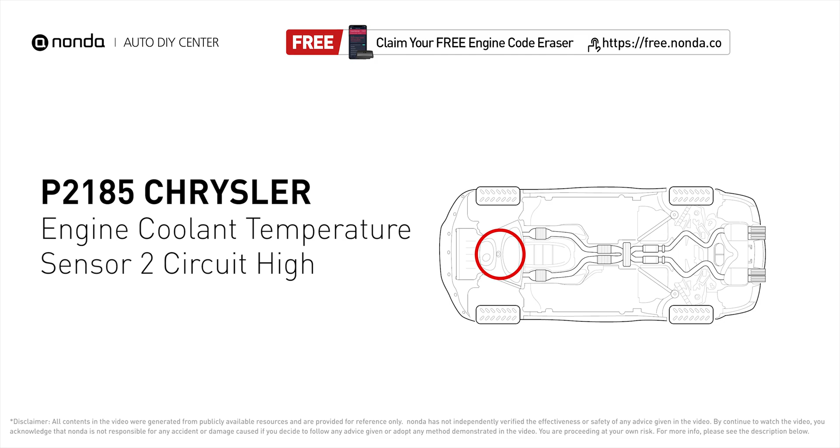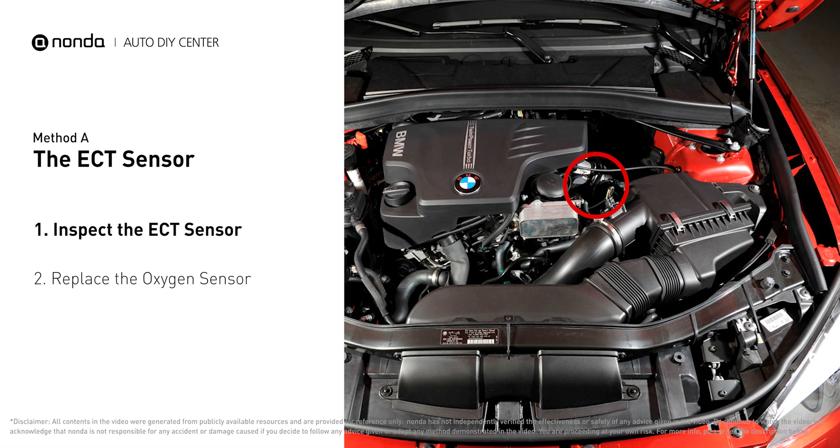Here are 3 of the most practical solutions to fix Chrysler's P2185 error code. Method A, the ECT sensor. In most cars, the primary ECT sensor is installed near the thermostat in the cylinder head. Remove the ECT sensor from the engine.

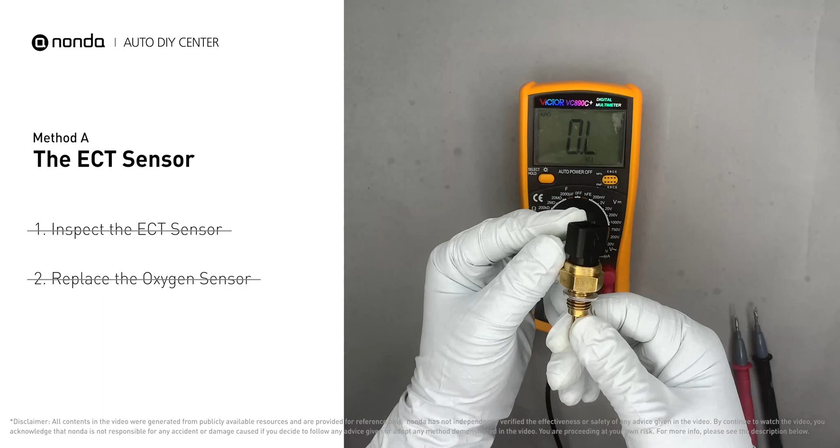Use a multimeter to proceed with a test on the ECT sensor. At the ambient temperature of 68 degrees Fahrenheit, the sensor resistance is between 2000 ohms to 3000 ohms. If you do not get a reading, this indicates that the ECT sensor is faulty and needs to be replaced. However, if the ECT sensor has a correct reading, then we will proceed with Method B.

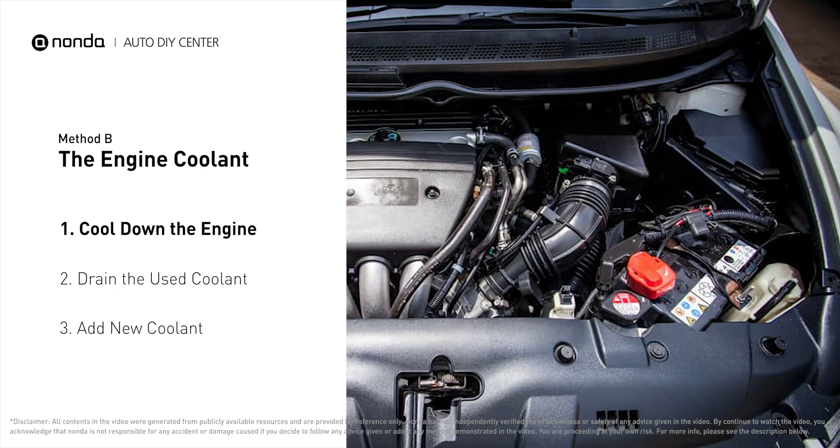Method B, the engine coolant. Engine coolant reservoir is often a translucent white bottle, and the radiator is the large panel at the front of the car. Cool down the engine and remove the radiator cap. Locate the radiator lower hose. Place a container underneath the hose. Remove the hose and allow the coolant to drain.

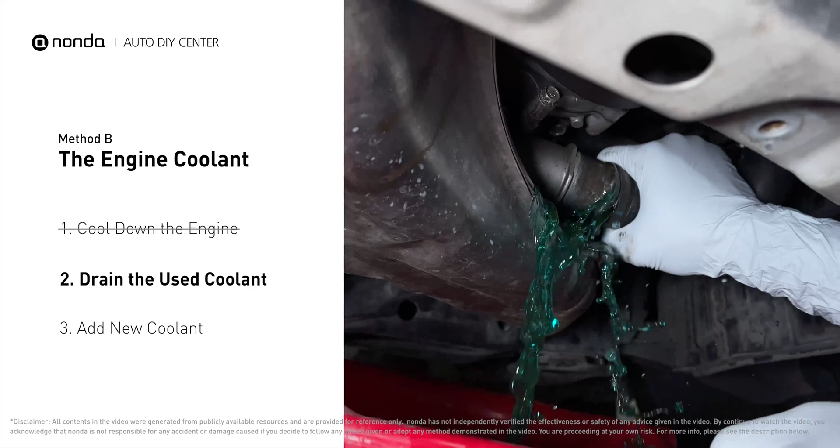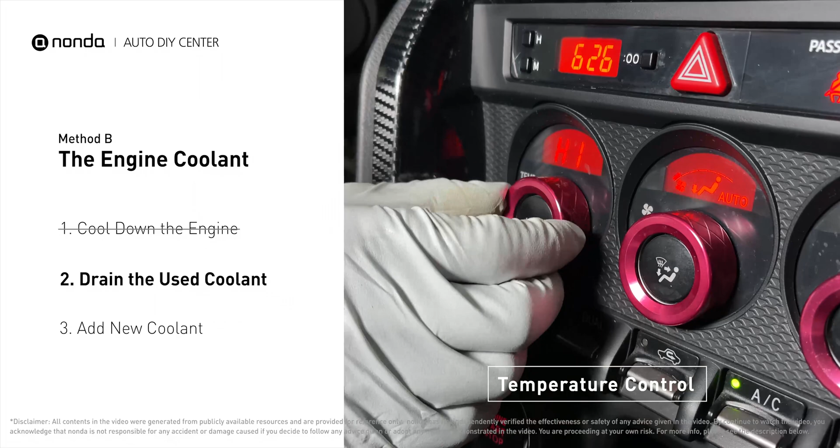To better drain out the used coolant, start the engine and turn the temperature control to maximum heat. Closely monitor the coolant temperature gauge on your dashboard to prevent engine overheating. Once the used coolant is drained out completely, turn off the engine and replace the hose.

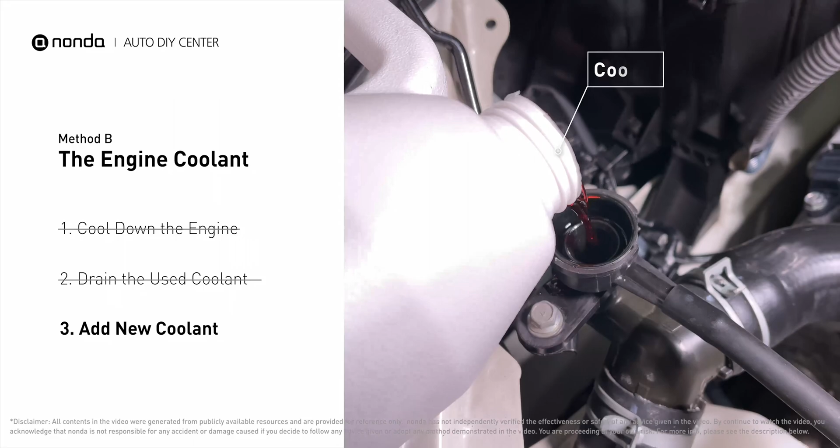Next, add fresh coolant to the radiator until it reaches the base of the filler neck. And then take off the cap of the coolant reservoir, fill it with fresh coolant, not exceeding the full line, then replace the cap.

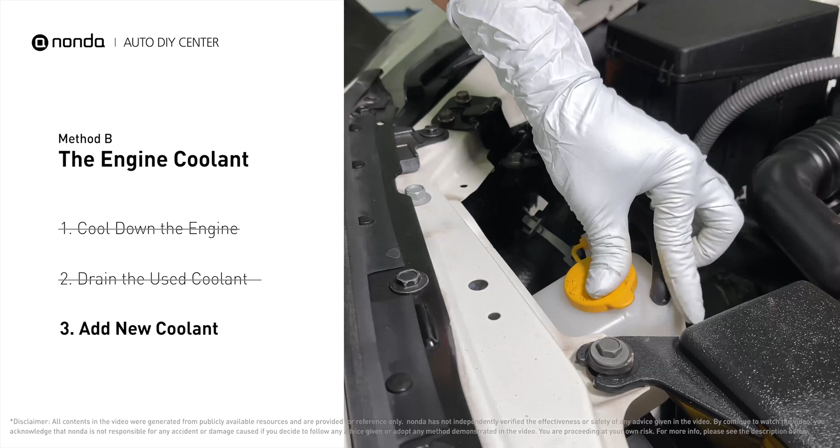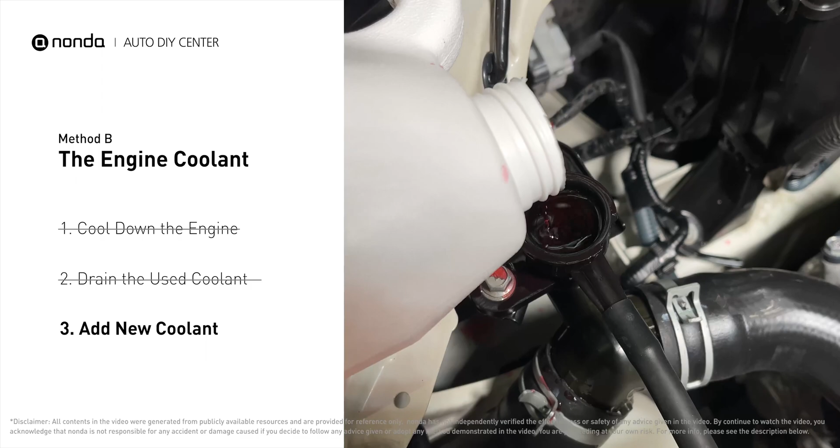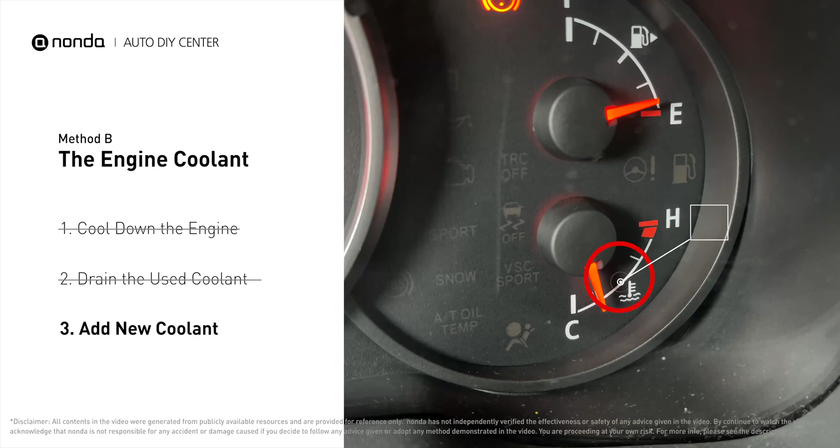After filling, start the engine, and let it idle for a few minutes to let the system purge all the air out, and then add coolant as needed. Replace the radiator cap. Closely monitor the coolant temperature gauge on your dashboard. Once the coolant temperature reaches 190 degrees Fahrenheit, turn off the engine. After the engine has completely cooled down, remove the radiator cap and add coolant to its full level.

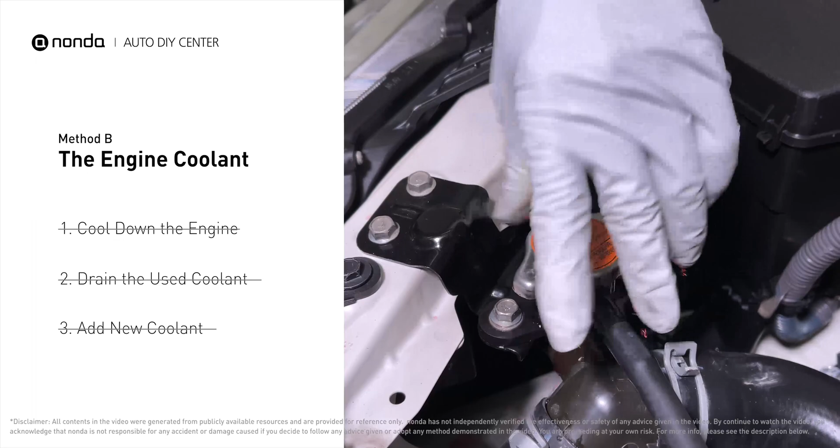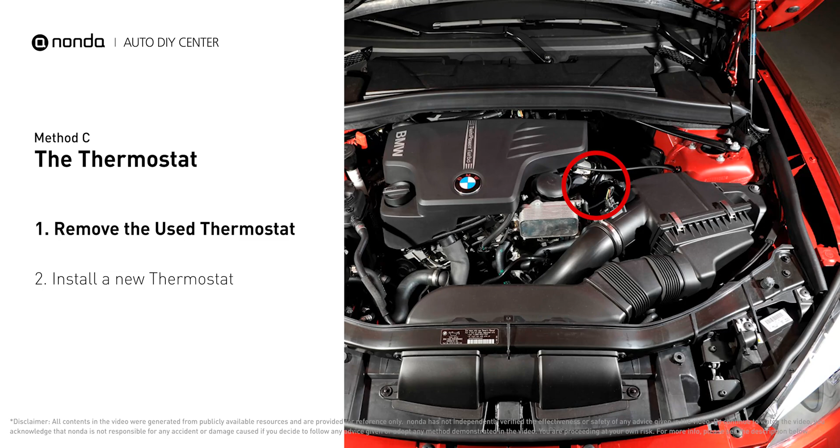Method C, the thermostat. In most cars, the thermostat is placed near the water pump on the cylinder head. First, carefully remove the thermostat from the engine. The engine has to be cool before attempting the process, and then install a new thermostat.

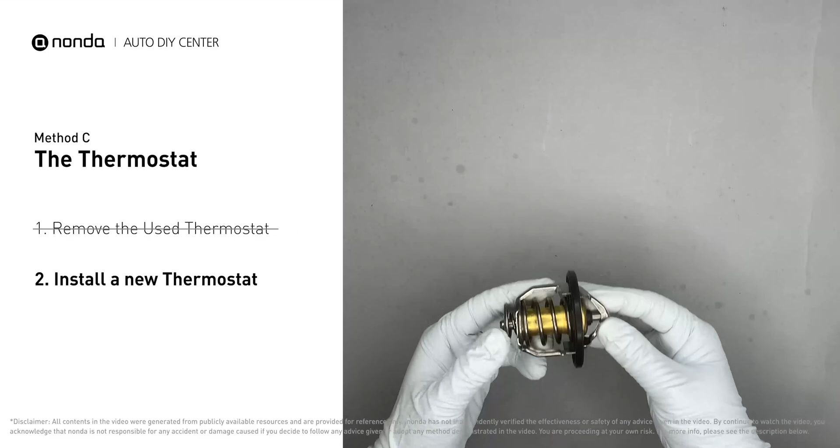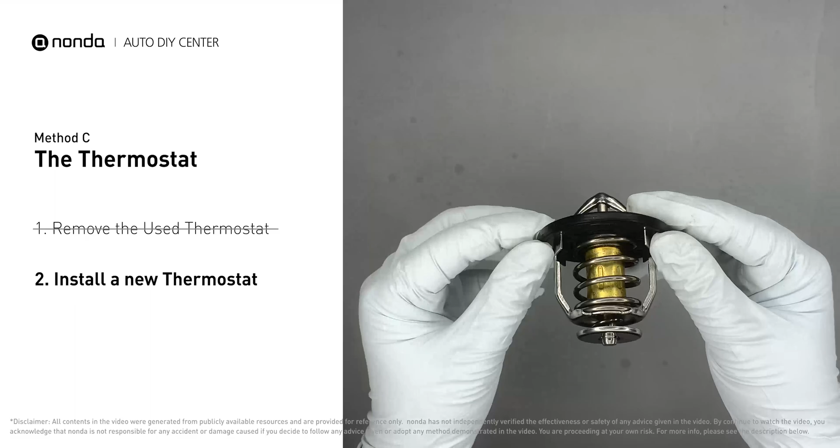To install it correctly, you need to make sure the short end goes toward the hose, and the deep end goes towards the engine. When you install it back to the engine, make sure the jiggle valve is pointed straight up to the top of the engine, so the air can get through the system.

So here are 3 of the most practical solutions to fix Chrysler's P2185 error code. After the repair, you can now use the ZUS app to clear the error code. And tap the rescan button one more time to make sure everything is fine with your vehicle.